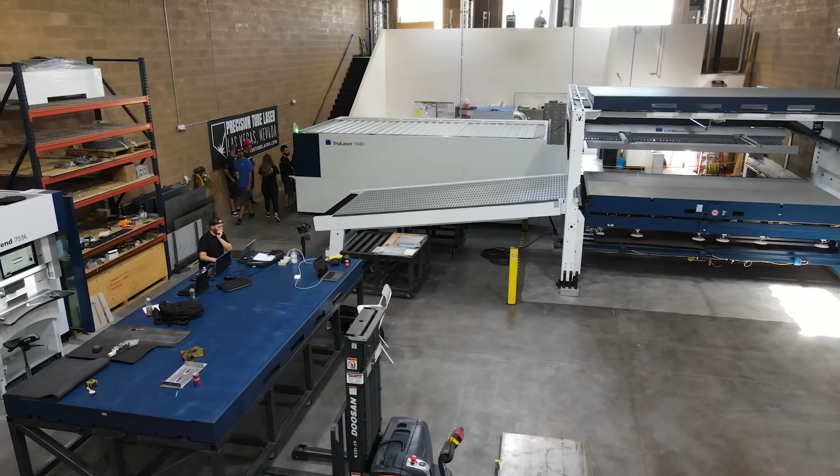All right, so on this episode of the TT Bug, episode 2, we went to Precision Tube Laser. We had some technical difficulties with a memory card. This technology thing ain't for us with the whole filming, but we can build trophy truck chassis.

Essentially, we went there and got all this 4130 chromoly from Industrial Metal Supply. Kevin worked directly with Jordan on a process of taking his designs off the computer in SolidWorks and exporting them into files the tube laser can read, and then it automatically spits out all the pieces. The cool thing is there's very minimal drop.

Any fabricator that does anything by hand has so much drop and it takes so much time. We'll show you guys these tubes, how they're labeled, and what these copes look like when finished. We'll include a couple clips from our cell phones and Instagram of the tube laser working, because this machine is a $1 million machine that is just superior, with an automated loading system and the latest and greatest Trumpf machines.

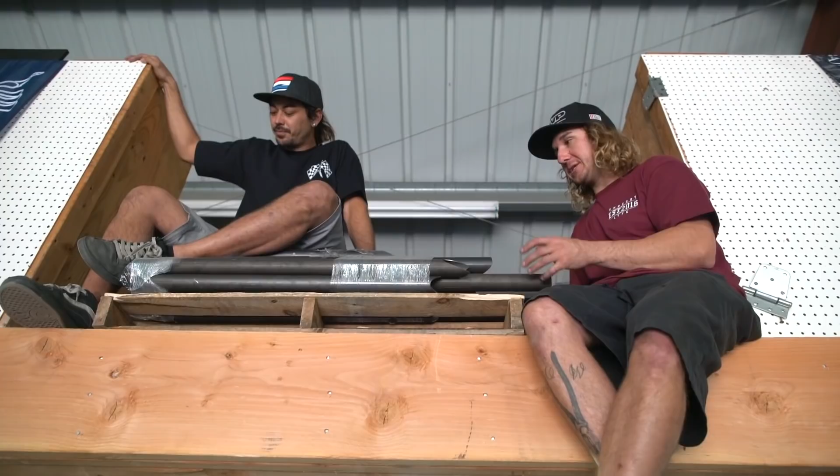Absolutely. So come up here and check out some of the quality of this work, this laser cut, and the labeling. We'll throw in some clips we got, then dive into the whole flat plate process and some of that other stuff.

Later on another episode, we'll go in detail on all the geometry, the roll centers, and leverage ratios on the shocks that Kevin methodically put into this chassis to where there's no turning back. He's a very precision type of guy, so he went back, learned some new info, adjusted, and made this thing to where it's gonna be...

Jaws. That's the name of her, Jaws. She's big and bad. We're gonna let her eat. Yeah, we're gonna let her eat. She's hungry.

Come check this out. So check out all this stuff. Come get in deep. Get in deep on here.

So on the underside of the pallet, this is all the straight tube we had done with Precision Tube Laser. This is literally a full chassis worth of tube right here on this pallet, and on that pallet there's another chassis worth of tube.

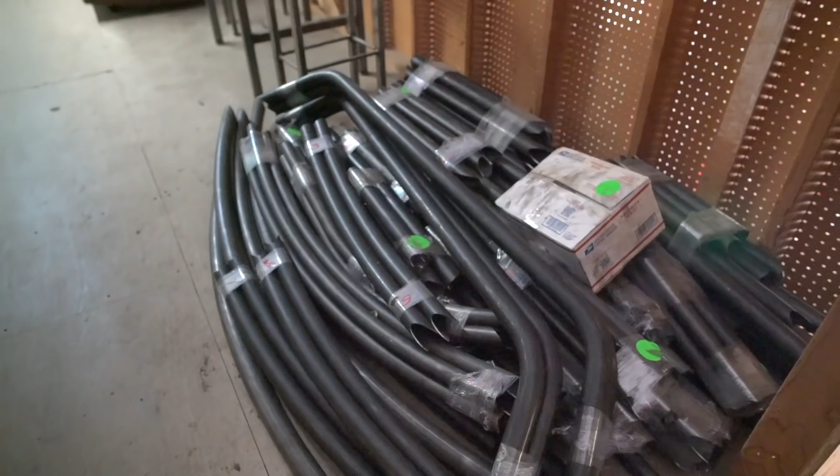All the bent tubes and the radiuses we had done with LSK, Cal West Manufacturing. They have a sweet operation with a pretty awesome machine that will do the bends and the rolls all in one process basically. They've got that super dialed in, so super excited to get that all fitted up.

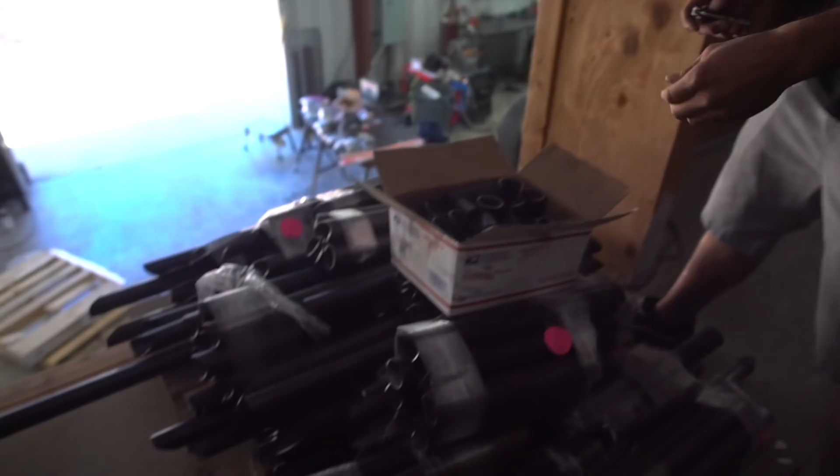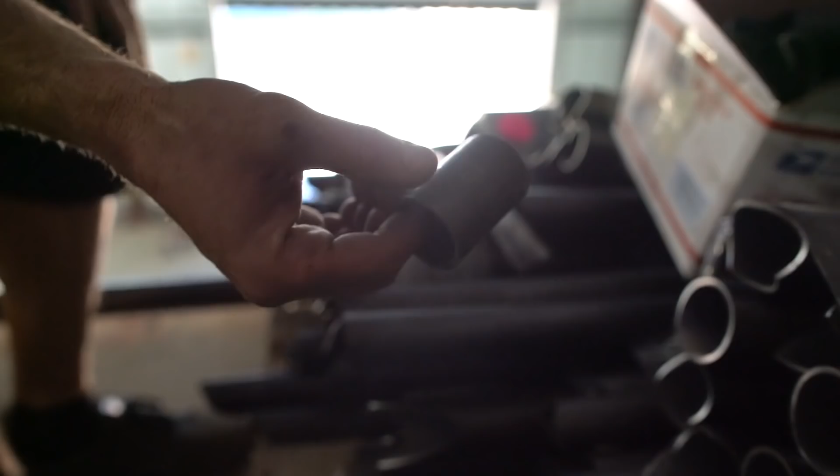If you look closely, you can see each tube is labeled with a code. Everything is labeled. So this is an insert T3 TTSD. Each one of these is imprinted into the drawing, so we know where every one of these tubes goes.

Each tube is like TTSB 17, so the B is the thickness or the diameter - inch and 3/4, I believe we did. Inch and 3/4 120 is B, A is 2 inch 120, C is inch and 3/4 095, etc. So it gives us a nice system to easily identify what we're looking at.

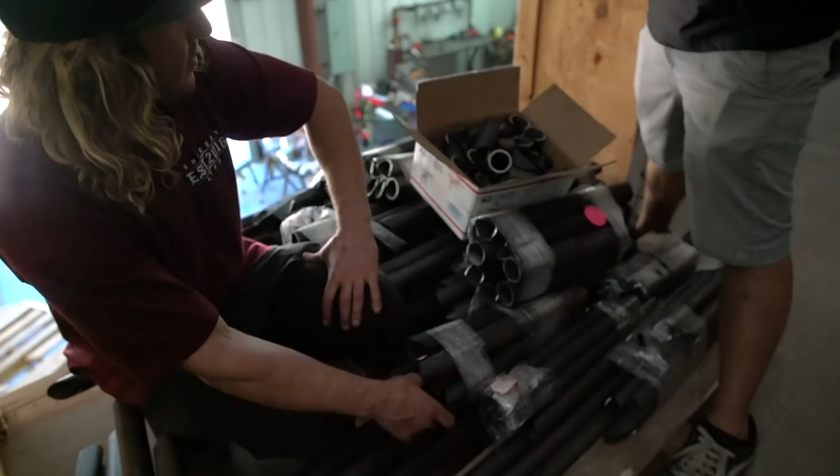When we have a big box of little tubes like this for, say, gussets or inserts, it's really easy to look at the part number and say, okay, this goes here. I can look at my drawing on the computer and match it up very, very fast, as opposed to trial and error trying to figure out where the hell this thing goes. So it saves a lot of time that way.

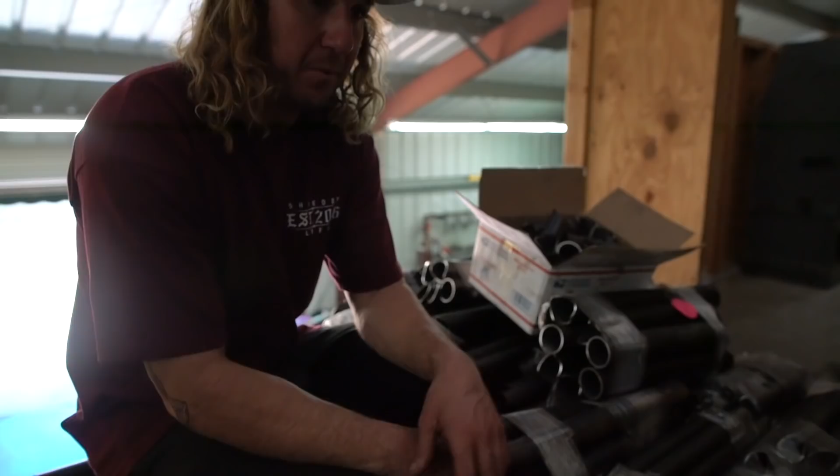Really expensive adult Legos at this point. The footwork was done on the computer for the last year by Kevin to get this to this point, and then back and forth with precision to make sure that there was no tube junctions that were fighting each other.

I think out of the whole chassis, you maybe had like 1 or 2 flaws that you had to go back on. Yeah, and it was mostly, it wasn't even so much a flaw as much as limitations of the machine, as far as when it comes to the bends and so forth.

On some of the rolls, you can only get so close to the end of where the notch is. The machine can only get so close to it, so you have to compensate for that in the design, as well as LSK has some little tricks for that too, where there's actually breakaway pieces on the tube, so the machine can pull it in and then the piece breaks off so it gets really close to where you want it to be.

Yeah, lots of little tricks and things we've learned along the way that speed up the process. That was through LSK, but for precision and all the straight stuff, dude, it was pretty much spot on. It was pretty much all there.

125 tubes. It doesn't seem like a lot when it's on the computer and you're looking at it all, and then it's all in front of you and you're like, holy shit, there's gonna be so much welding going down.

So I guess now that you guys have seen the straight tube and the finished work and how clean these notches are and how intricate some of them can be, where different junctions come together, let's show you guys their facility. Let's show you guys the flat plate work, and just run it.

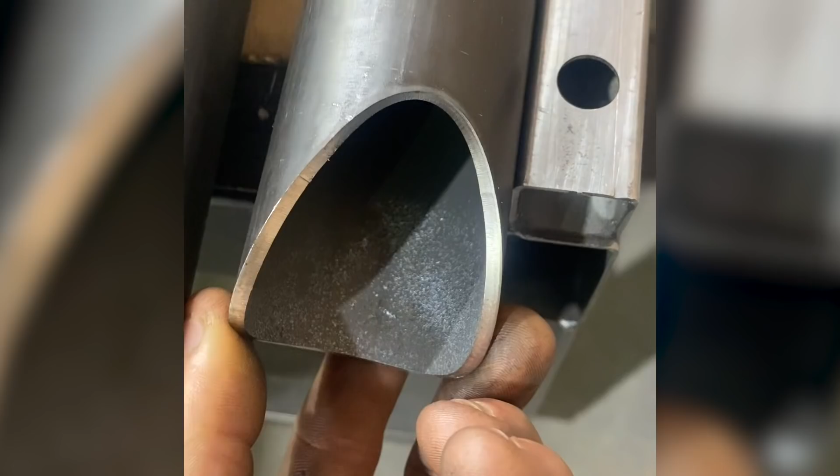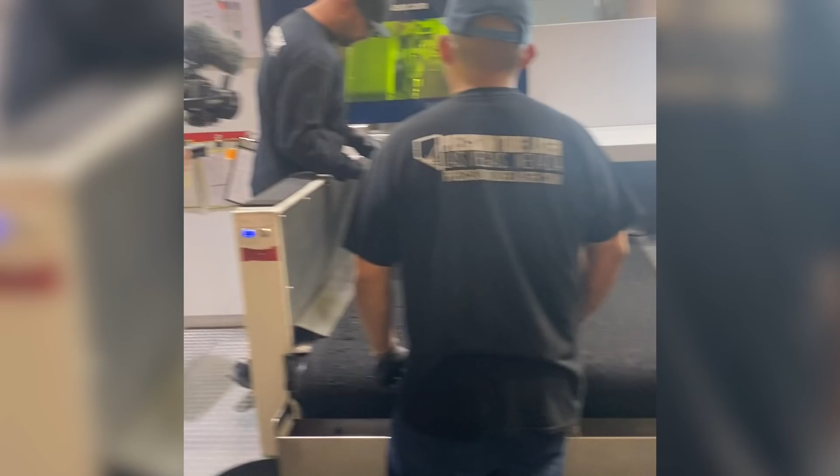And so it begins. TT Bug is getting cut out, dudes. Oh shit! No way! This is crazy. This is unreal. Oh my!

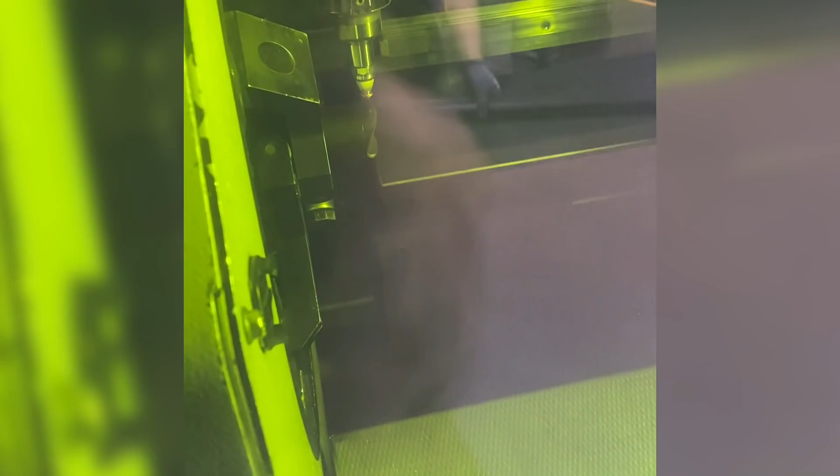Get up there, man. You gotta film your baby on the floor here, alright? Yeah, this is like giving birth. Here we are, giving birth.

Look at that. Oh my. Next level, boys and girls. We're killing it, checking quality. Look at this.

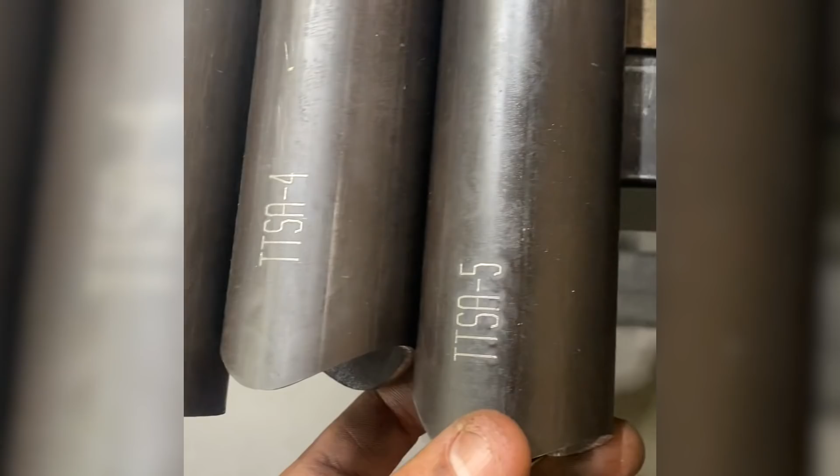Everything's labeled. Kevin, you ever think it was gonna come to this? Absolutely, man. Yeah, good answer. Progression, man. Where we've been headed for a long time. I like it. There's all the tube for not 1 but 2 of these TT Bug chassis.

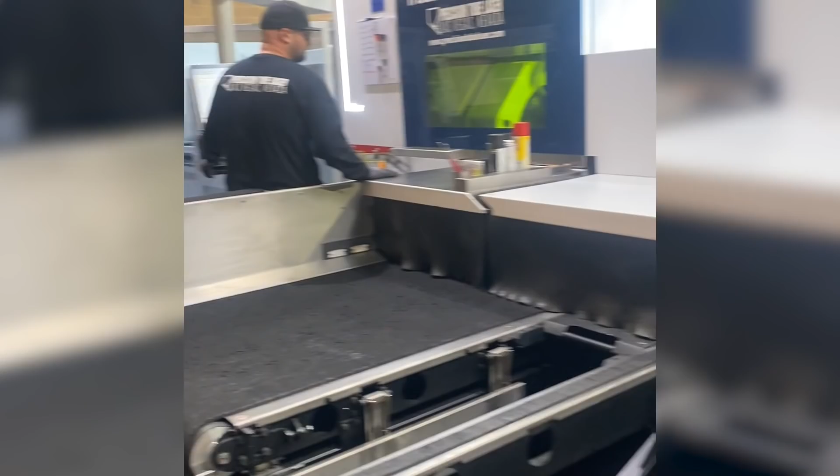And then we got all the plate work going on the flat laser next. It's gonna be a pretty eventful day here at Precision Tube Laser in Vegas. We stayed here for this.

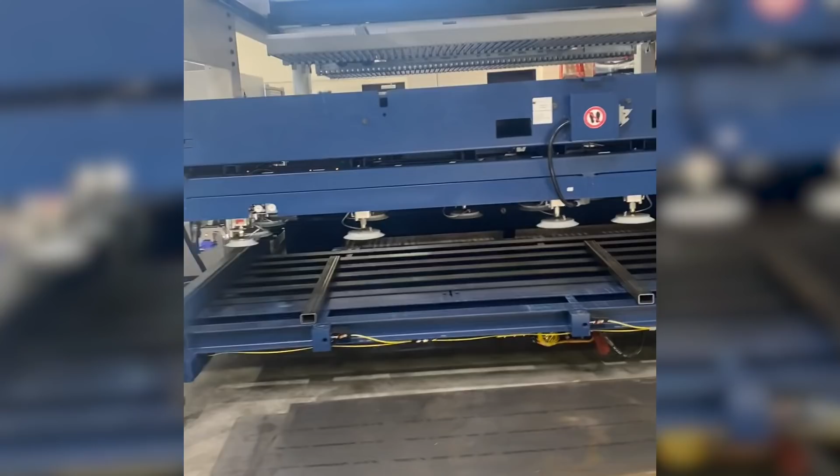Also another jig table to come for smaller pieces. Here's all of our flat plate that's gonna go into this Trumpf machine that will just do it all.

This is the auto loader right now. It's taking all the 2-inch out of a bundle that's laid in these rails right here, and then comes up, picked up by the machine, as you can see right here, measured, sighted, and put into the program for what it can cut and what's going to maximize all of our tubing.

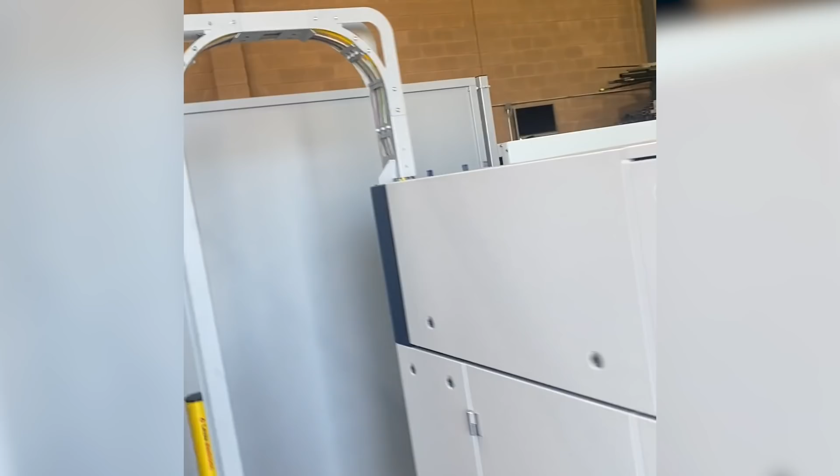It is absolutely next level, and one of the most elite tube lasers in the game. And its efficiency right now, it's cutting out each tube in under 10 seconds. Under 10 seconds, each one of these tubes is being cut out.

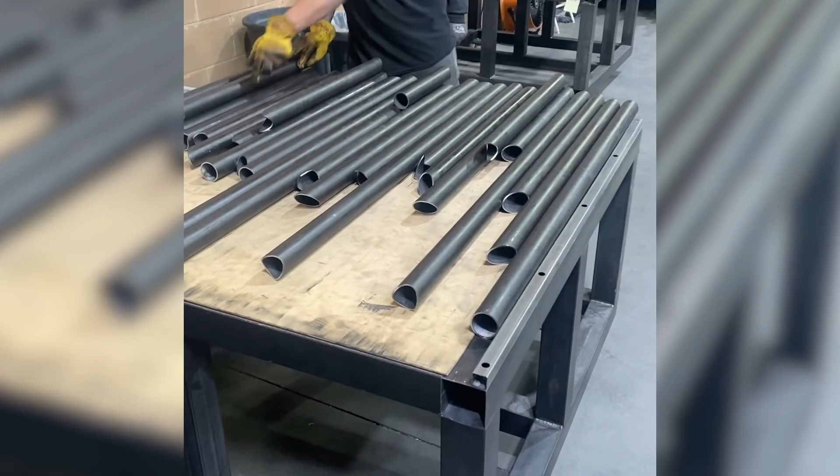So we'll probably have a full chassis cut out in, what do you think a full chassis will be cut out in? 20 minutes, something crazy like that. This is just the 2-inch we're doing first. Yeah, this is all the 2-inch. This is going to be about 20 minutes per chassis for the 2-inch.

Oh my God, so gangster. Today's a good day. This is another way for us to level up our game and show partners what we're capable of doing with our team.

It's been a dream since we've been kids. Kevin and I just infatuated, eat, sleep, and breathe off-road, and started with dirt bikes with both of us, and transitioned into the 'with age comes a cage' type of deal. But yeah, we're just gearheads and we like to have fun and build cool shit.

I should probably put shoes on, huh? I should probably put shoes on. We're gonna be dealing with some heavy shit. Yeah, we're moving shit.

Shoes. I feel like if I don't have shoes on, I'm not working as hard as I should be.

Arrived at Precision Tube Laser in Las Vegas. Today's an exciting day. We have 2 chassis to cut out today for the trophy bugs. This has been a long time planning, and Jordan is super helpful. He's helped us prep this whole chassis for laser cutting today, and today we're gonna see it all happen. So pretty excited, and yeah, we're gonna get this thing going.

Hell yeah. We're going from the bottom to the top, baby. Yep, just had a good weekend in the Slug Shark at the low level, and we're fucking going straight to the top next year. Well, we're gonna try, we're gonna try. We gotta aim high, man. Yeah, shoot for the stars, as my grandmother would say. God bless her soul.

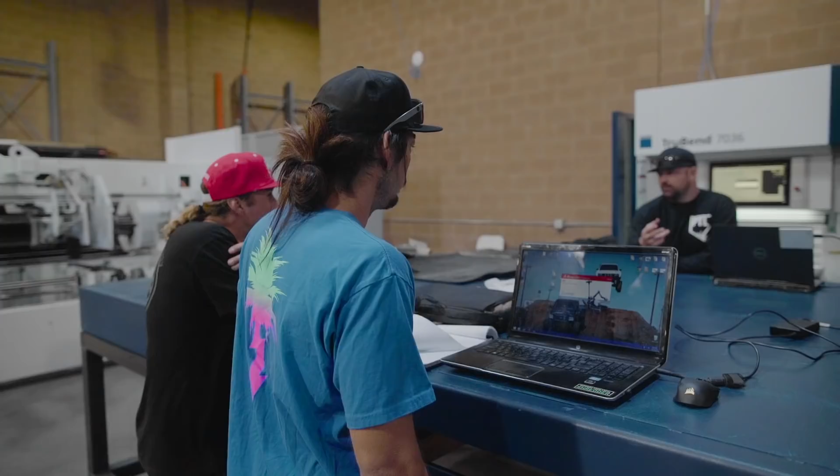120 an inch and a half 095. Took me most of the day.

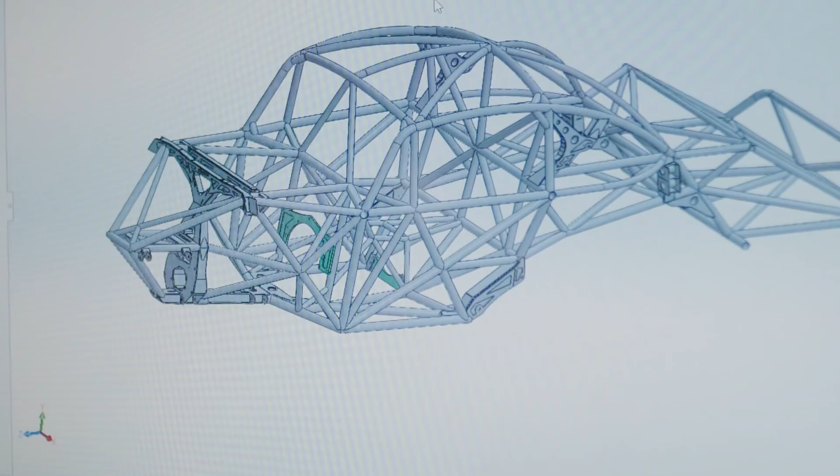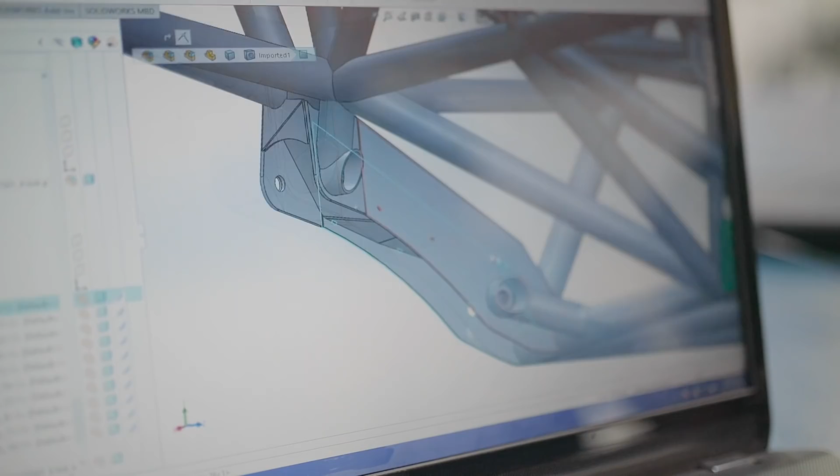We're just going over some terminology for different tubes. Basically each tube will have a specific call out to identify what and where the tube goes. That's going to be documented in a folder for us to identify where those tubes go, and they'll also be laser etched on the tube itself, so there's no way we can get things mixed up, and we can put this thing together efficiently and effectively. If we ever have an issue, we can just cut it off and order the section we need to replace it, throw it back on the jig and be back up and running, so there's not a lot of downtime.

It's a process. Jordan spent a majority of his Friday doing this for us. He's done it many times, and it's still a tedious process, but he handled it, and it makes things so much easier and more professional when we're planning on building a couple of these things. Tubes can get mixed up very easily, and...

Now they can't. Yeah, I mean, it's the most efficient way to do it when you're trying to replace tubes, right? These things are going to get wrecked at some point. So the biggest thing is making sure we're all speaking apples to apples when we're repairing stuff, so being able to know and identify what tubes.

So on here, I've got it broken down very simply. These are A's, right? Everything's the TTS. And then your A's are your 2-inch 120. Your B's are your 175 by 120. Your C's are your 175 by 095.

That way we kind of know what folder we're getting into, what section of the truck we're in, where we're at. So we're not just identifying it by a number, because you're going to have a lot of tubes that share the same number, but they'll be different diameters or different wall thicknesses. So we want to make sure we're cutting from the right wall thickness or the right tube diameter, just making sure we're speaking apples to apples.

Because if you have 3 150s on the truck, you don't want to have all these different tube numbers. It's easy to keep it simple, and the way SolidWorks extracts tubes, sometimes it duplicates numbers and things like that. So we find other ways to say, no, this is not an A tube, this is a B tube. So I can already know, hey, it's 1 3/4 120.

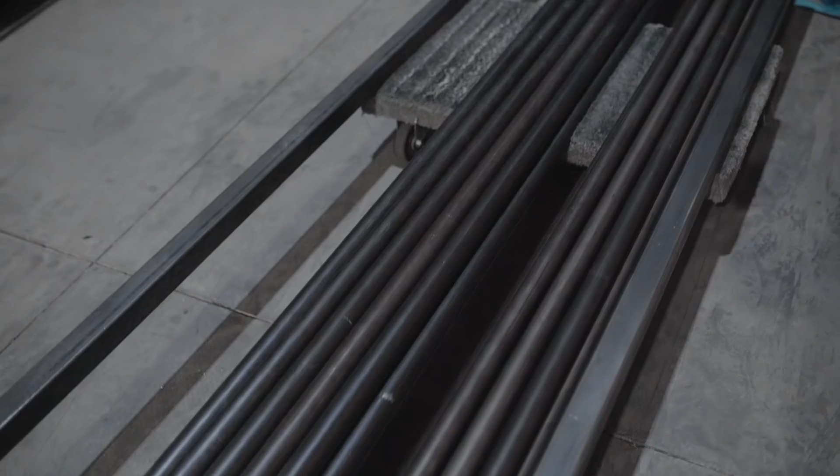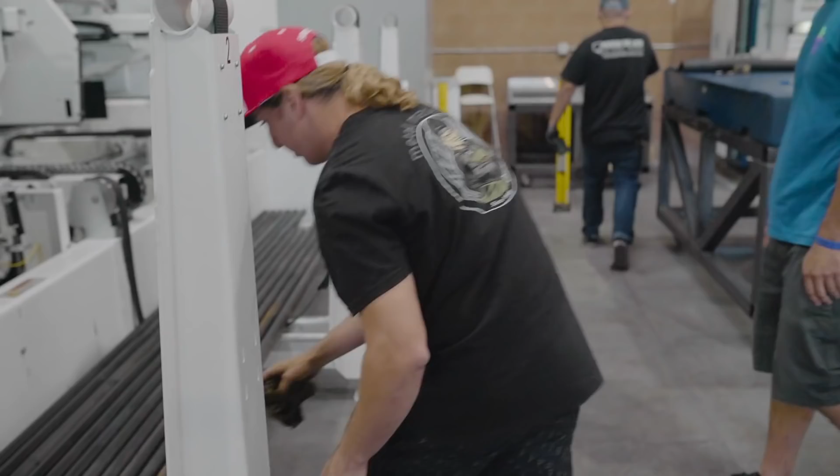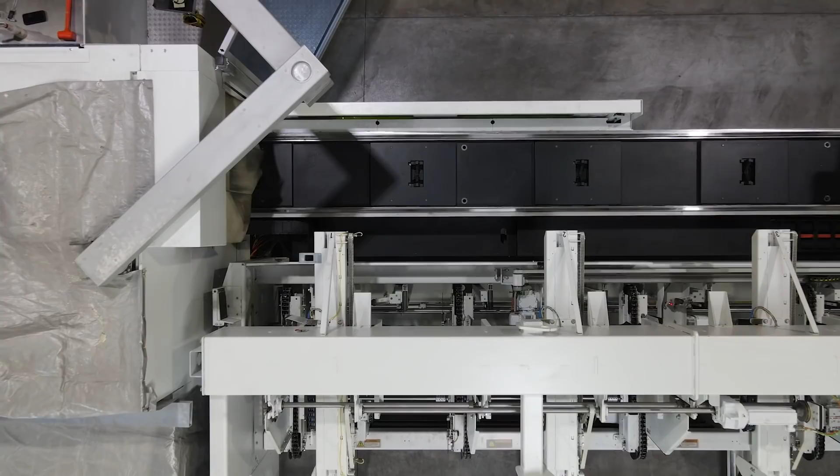It's an automated loading system. It's going to come up, hit the conveyor belt, go back, get picked up. It's going to sight it for how straight the tube is, and it's also going to give a measurement of how long it is to make sure it can use that piece as efficiently as possible with this material.

Here we go, first tube's getting cut, dude. Oh shit! First tube's about to get cut.

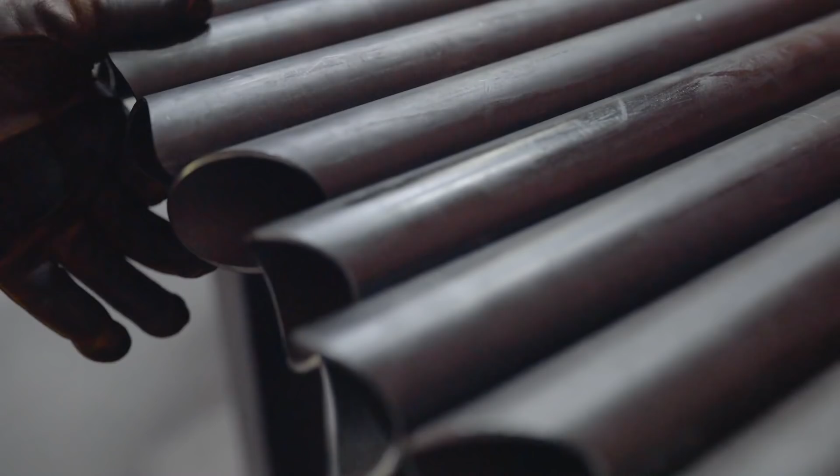We got the tube rolling heavy right now. We're working on flat plate right now, the bulkhead specifically, getting into where the software is driving in between both Kevin and I and Precision. They're bouncing some things back and forth. It's looking pretty promising, and while tube's cutting, flat's about to go next. Exciting, really exciting.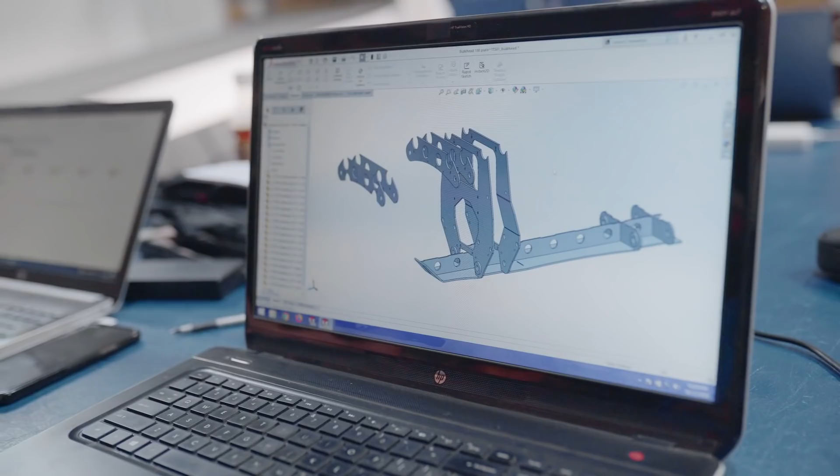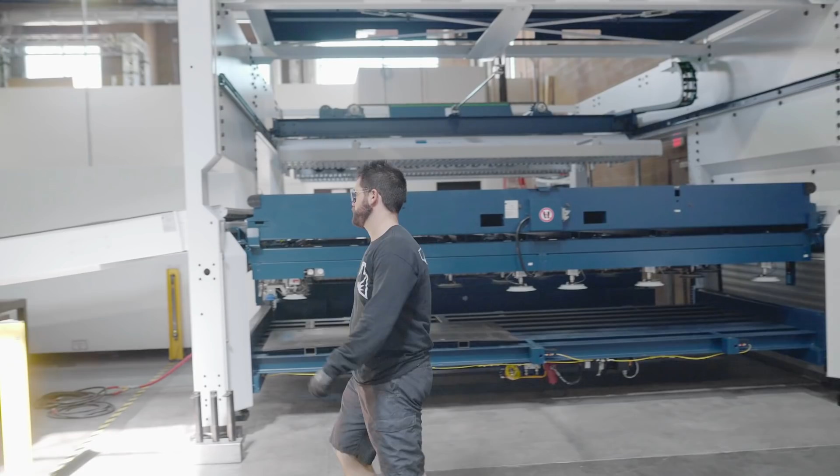Check this out, bulkhead 3/16 laid out. Free now from any sort of... it'll be all right, it stays pretty low. We run ours on there.

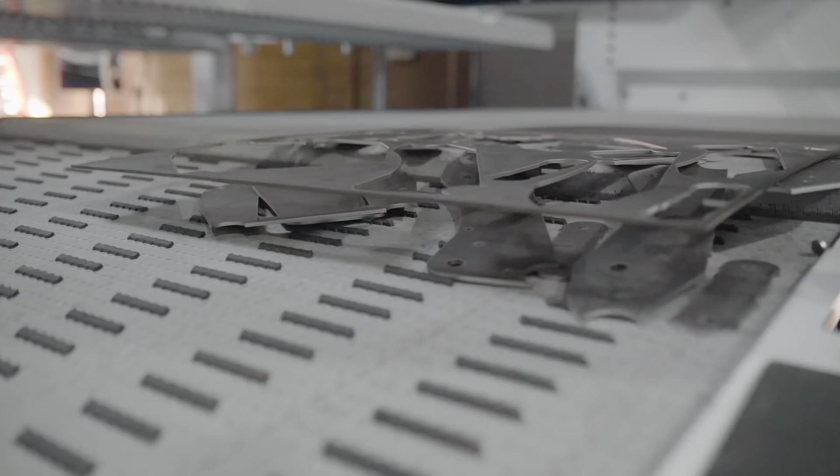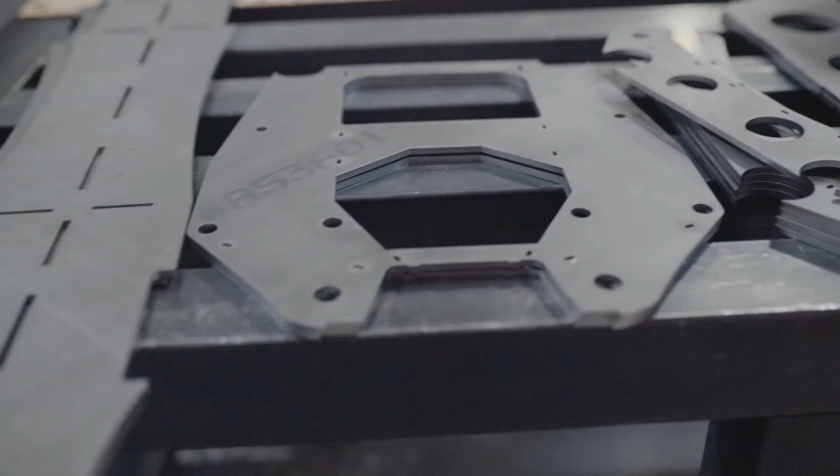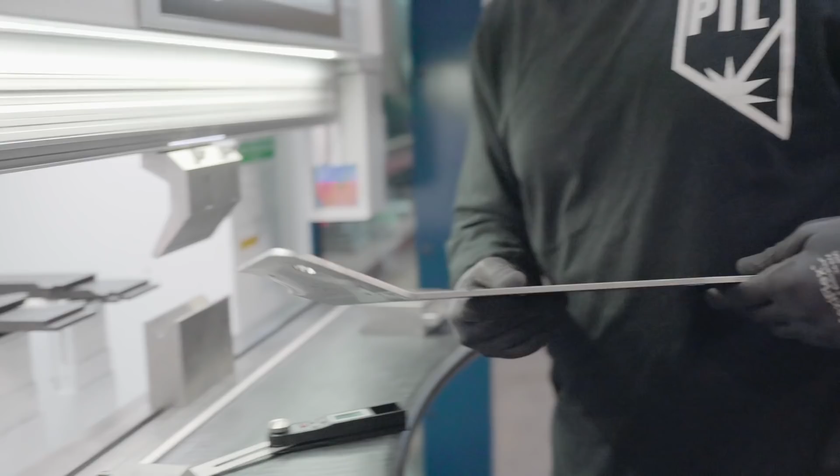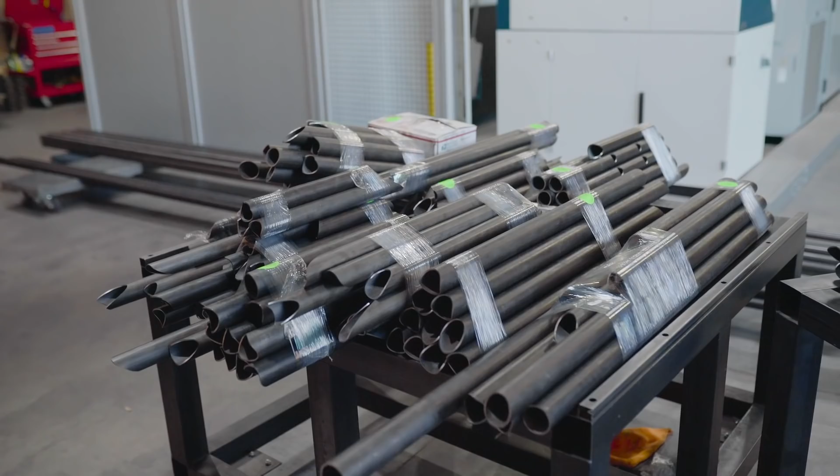Yo, we got all pink for one chassis, all green for the second chassis. We didn't even see this until the boys rolled this out. So everything's labeled, marked for tubing diameter, thickness, and all the above, and also labeled so each truck doesn't get mixed up. Sick!

Green chassis. What's in your bed, dude? Whole bunch of tube, he's laying pipe tonight. Yeah, he laid a bunch of pipe. Not yet, I cut pipe. Got a bunch of stuff going on. Tight, it's been a long day. The sun just went down, sun up to sundown again, as always. That's how we do it.

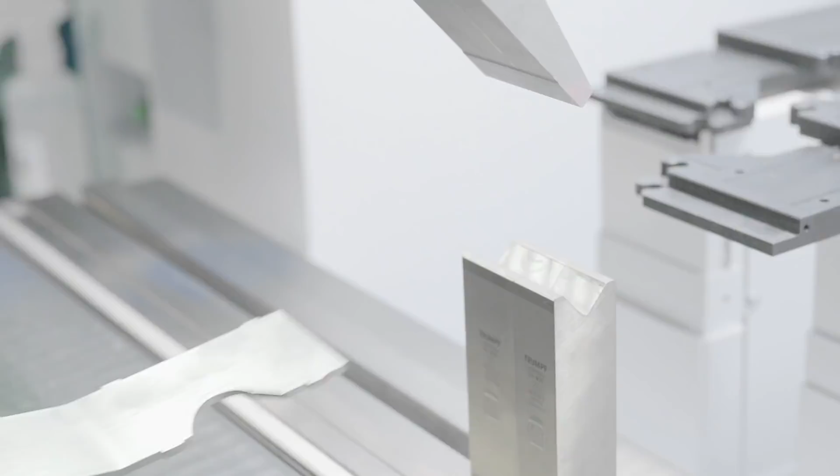I don't know how many hours it was today, but it was a lot. We got a lot done though. Next level stuff, these dudes straight killed it.

Come on dude, you gotta come on up man. I can't hold my drinks right here and do an interview. Come on dude, do you want me to hold those? Here you go. No, it's okay. All right boys, tomorrow morning. Tomorrow morning it is, all right. You guys kick ass. We're all right. Yeah, they guys are stuck. Hey, where's Kevin, is he still in there? Oh, he's taking a shit. Hey, Kevin's still in there taking a shit. Kevin, are you pooping?

Kevin! Kevin! Well, that's a wrap for today. Tomorrow we'll carry on this episode and finish out the rest of the upper shock mounts off the top of the bulkhead with all that plate work, the overlays for the rear pivots, and a couple more gussets in the back for the back half, as well as the rear bumps and maybe the rear shock mounts even.

Yeah, he's all, damn it, keep adding it on there dog. Listen man, it has to get done at some point, so it doesn't really matter to us. All right, you hear that? It has to get done at some point. Might as well happen today, or here's your Sharpie too. Oh thanks, I'll give it for tomorrow. You can have it, just consider it a gift.

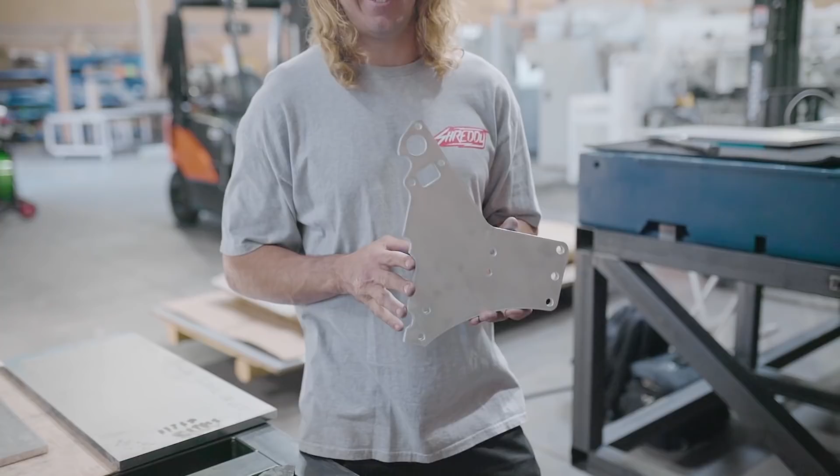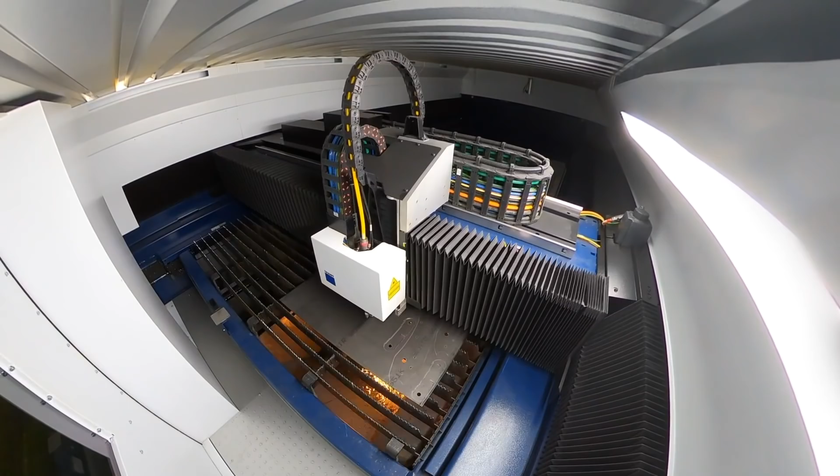Every part requires not necessarily different, but different size jaws for bending all this stuff. Different programming - there's a whole lot that goes into it.

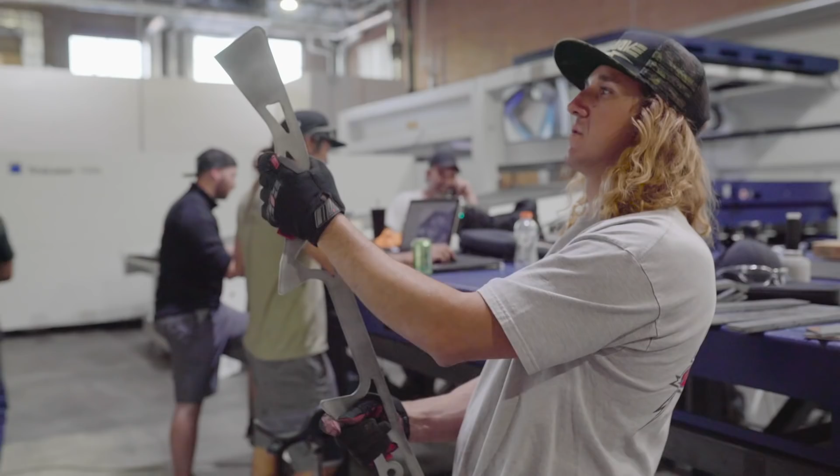Look at how sick these overlays are for the whole top, upper shock tower. It's gonna be beautiful. Beautiful.

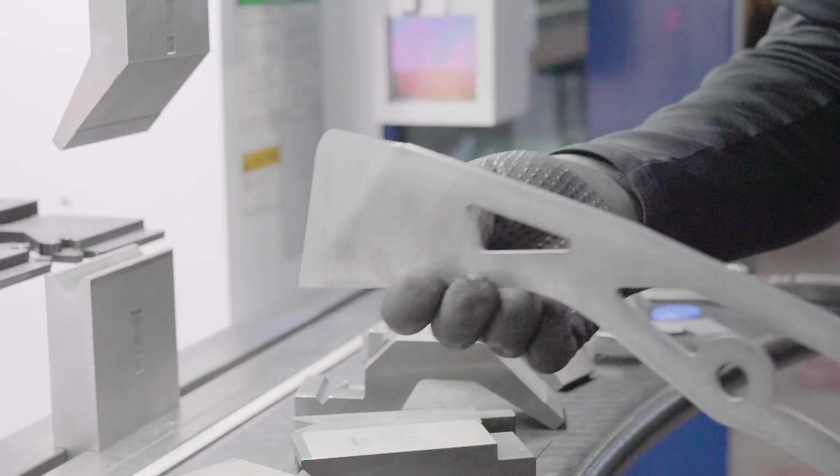Do you see how many parts and pieces are onto this? It's absolute madness, chaos. I don't even remember what the fuck I drew. I remember all of it. It's definitely surprising to see it all like this.

It's almost, I don't know what time it is, but it's really late, like 8 o'clock. These guys are still going hard right now for us. You don't find that in very many other places, that's for damn sure. Their customer service is insane. Oh god, I hurt myself.

A lot of parts. A lot of parts? A lot of parts. Oh, okay. A lot of parts for the TT Bug. I'm starting to get delirious, I'm getting accents again. Whenever you hear me with an accent, I'm either really tired or just out in Oklahoma hanging out with Papa B too much or something like that.

But we're gonna load up the TT Bug chassis, the remaining parts like the bulkhead, shock mounts, lower arms, spindles, all that good jazz. Motor plates, we're loading all that stuff up.

It was a super productive day once again - 2 days of just slicing and dicing here at Precision Tube Laser. These guys are on it, their crew is tight, they know what the hell they're doing. And we got such a solid team for building these, duplicating these, and fixing them if we mess anything up.